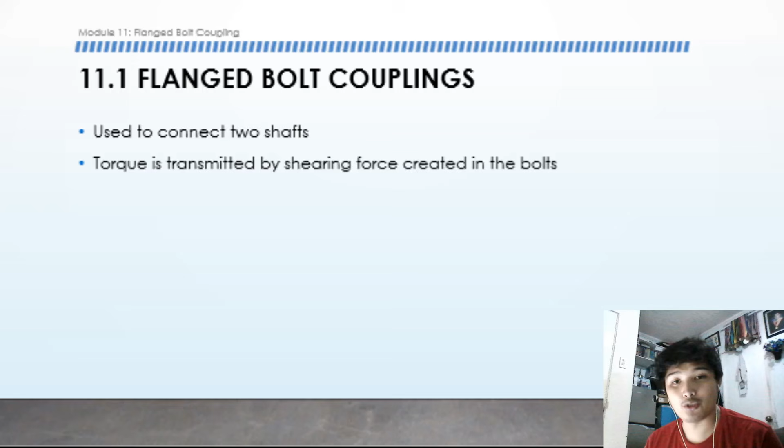So what is flange bolt coupling? Flange bolt coupling is used to connect two shafts, and torque is transmitted by shearing force created in the bolts. So what does it look like in actual application, class? Okay, so it looks like this.

So as stated, it is used to connect two shafts. This means, class, it's possibly because we can't manufacture a very long shaft. So what we do is make two shafts and then connect them. And that connection is what we call flange bolt coupling.

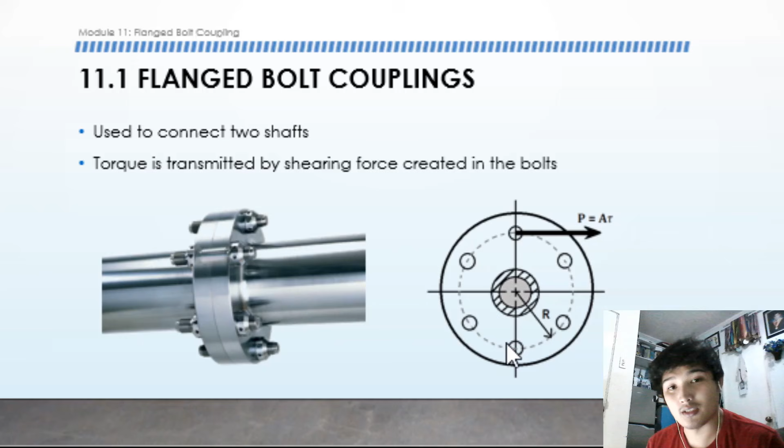So the tendency is, possibly if the force is large enough, it can exceed the allowable shearing stress of our bolt, so it's possible it can break. So we need to consider how much force P the bolt can carry, so we can also design how much torque this flange bolt coupling can resist. Okay, let's start the analysis, class.

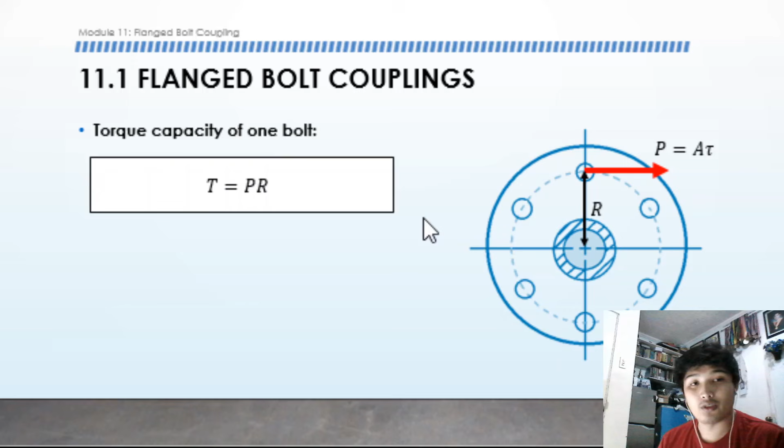Or shall I say, for n number of bolts in one bolt circle, to make our formula general. So we say, class, that all of them offer resistance to the torque, each with the same amount of P.

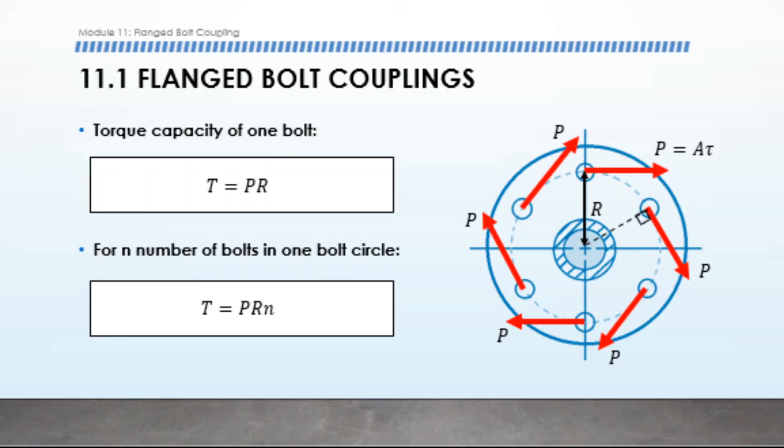So, dapat perpendicular po sila. Ayan, offer din siya ng P. And then, lahat ng bolts mag-offer ng P. So, therefore, the total capacity ngayon ng 1 bolt circle natin na torque is PR times the number of bolts. Okay po? Madali lang siyang tandaan po, ano?

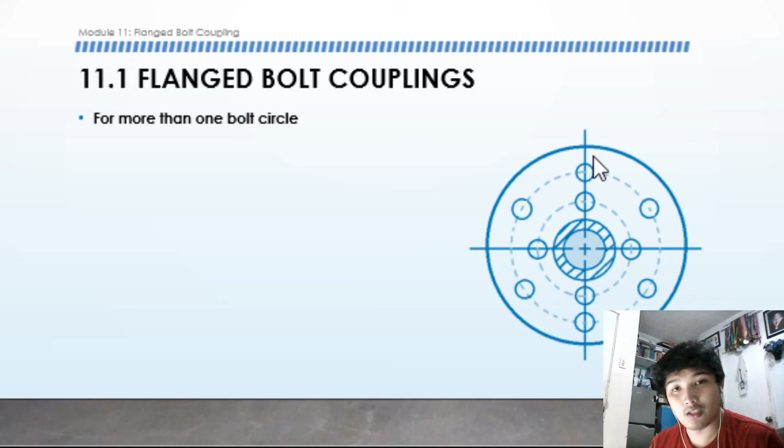So, next, what if hindi lang 1 bolt circle ang nag-exist? Possible kasi, class, na dahil sa sobrang laki ng torque T na kailangan ipa-carry natin, kailangan natin ng sobrang dami ng bolts para ma-resist siya. So, what if ganito po yung nangyari? Meron tayong outer bolt circle and then inner bolt circle. Okay? So, ano po naman po yung capacity na torque nito? Flange bolt coupling na po na ito.

So, kung i-analyze natin po siya, yung outer bolt circle is may radius R1. And then yung inner bolt circle is meron siyang radius R2. So, di ba sabi natin, class, is that mag-offer sila ng resistance. Therefore, yung outer bolt is mag-offer siya ng resistance na P1 since R1 yung ginamit natin sa kanya. And then, syempre, yung inner bolt, mag-offer din siya ng resistance dun sa torque natin, which is P2 naman po. Okay? Kung makikita mo yung diagram ko na to, class, mas mahaba yung ginamit kong line for P1 and then mas maiksi sa P2.

Kasi, class, kung marirecall nyo sa discussion natin sa torsion, di ba, yung maximum shearing stress is nandoon sa extreme fiber. So, pag mas malayo ka, mas malaki yung shearing stress mo. So, the same dun sa force na i-carry niya. Mas malayo ka sa center, mas malaki yung force na i-carry mo. Tapos, habang mas lumalapit ka, mas lumiliit.

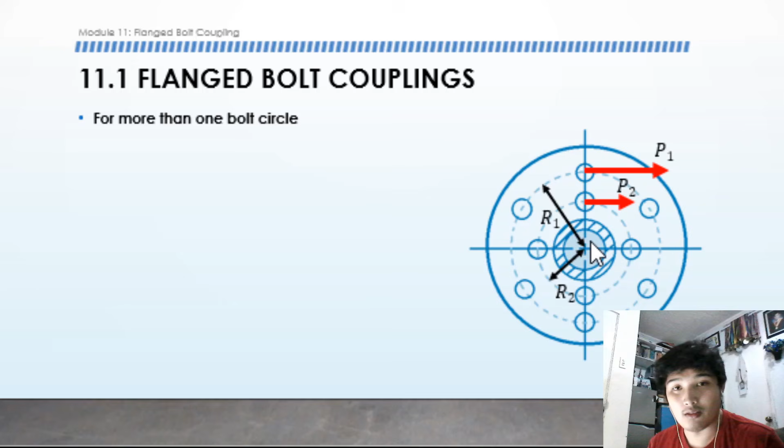Okay po? So, kung ang bolt capacity nito ng outer bolt natin is P1 times R1, tapos kung ilan sila, so that is P1 R1 N1. At yung bolt capacity naman ng inner bolt circle natin is P2 times the radius niya R2, tapos times kung ilan sila is N2. So therefore, the total capacity ng ating flange bolt coupling is P1 R1 N1 plus P2 R2 N2. Ganun po siya. Okay po?

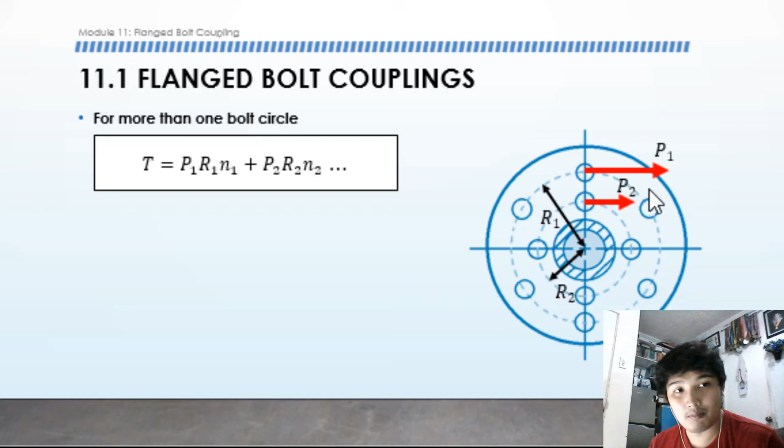Ngayon, class, kailangan bigyan natin ng relationship yung force carried by the outer bolt circle pati nung inner bolt circle natin. So, may relationship sila, class. Anong relationship niya, class? Okay, ayan, linear ang relationship. Pero para maging general ang relationship niya, class, ito po yung formula na susundin po natin: that P1 over A1 G1 R1 is equal to P2 over A2 G2 R2. Okay, yan po ang general formula ng relationship ng P1 to P2.

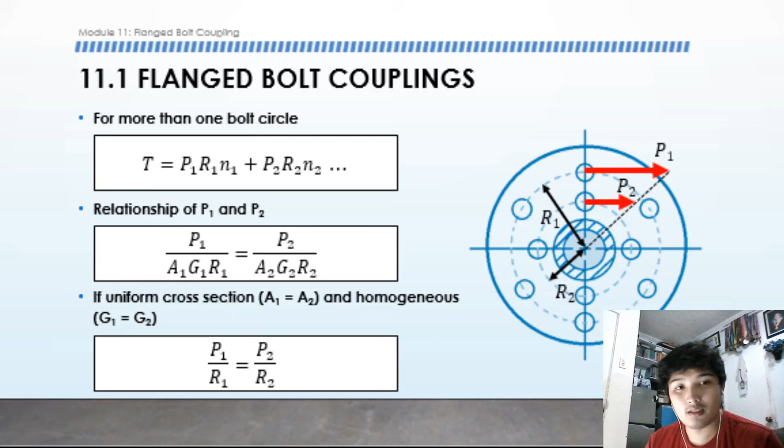Ngayon po, class, madalas kasi ang ginagamit dito is that yung bolt na ginamit sa labas is the same ng bolt na ginamit sa inner bolt circle. Or shall I say that yung area neto is the same dito. At dahil same sila ng material, so therefore, same din sila ng value ng shear modulus. Okay? So, kadalasan ganun po yung nangyayari. So, to simplify further the equation, if uniform yung cross-section and homogeneous yung mga bolts natin, so we can say that P1 over R1 is equal to P2 over R2. Yan po yung simplified equation relating P1 and P2. Okay po?

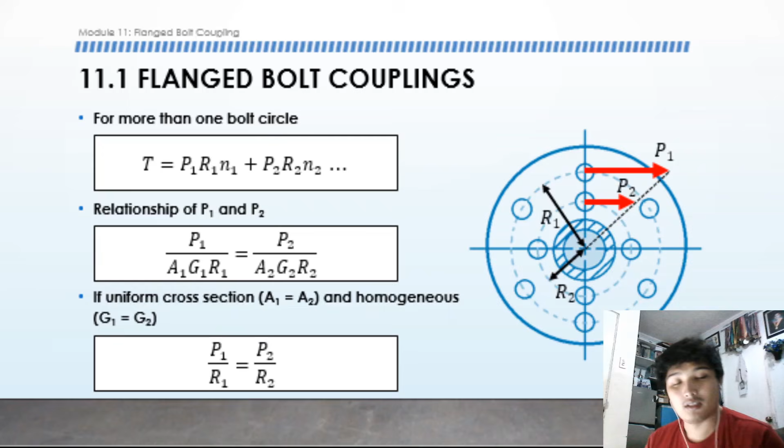So, patandaan na lang po ng mga formula and then gagamitin na lang natin siya mamaya. Yung formula na yung, class, madadali pa yung tandaan. Okay, so madali lang yung analysis natin dito sa flange bolt coupling. Okay? So, yun lang yung mga formula involved, no? Maiksi lang siya. So, mas maganda is i-apply na lang natin yung mga formula na na-discuss natin sa mga sample problems natin dito sa topic natin.

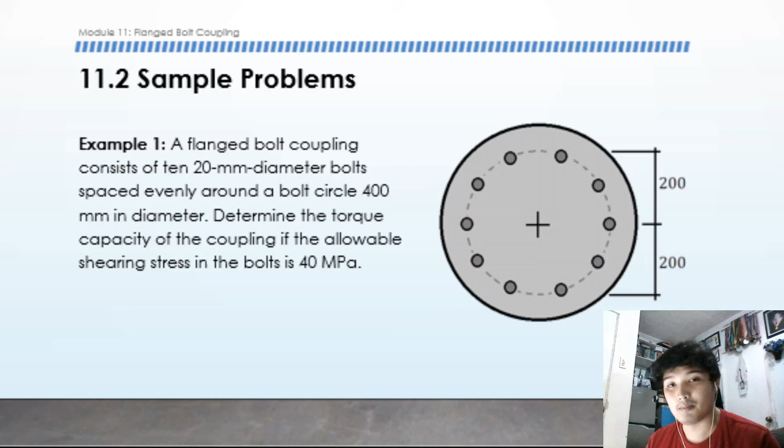Okay po? So, let's say for example, number 1, a flanged bolt coupling consists of 10, 20 mm diameter bolts spaced evenly around a bolt circle 400 mm in diameter. Determine the torque capacity of the coupling if the allowable shearing stress in the bolt is 40 MPa. Okay? So, first thing to do is i-draw muna natin siyang ulit.

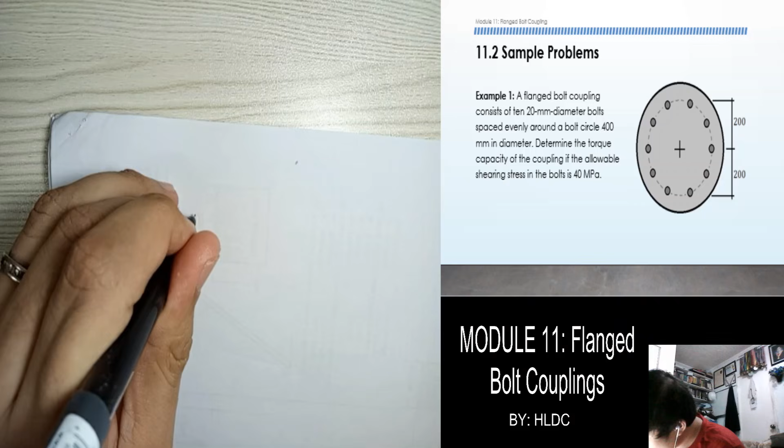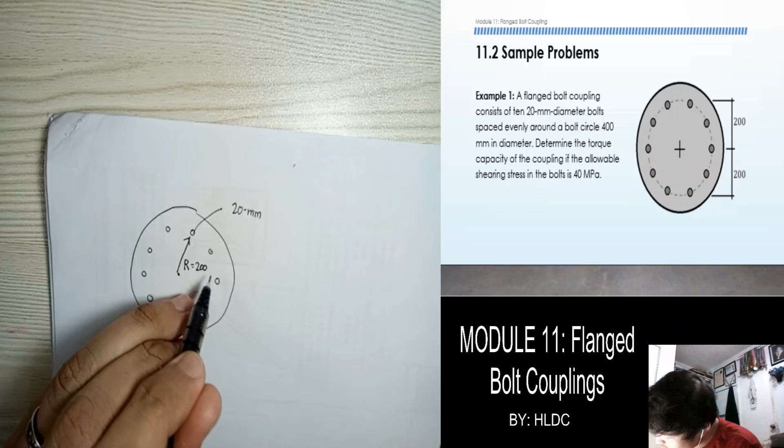So, ito daw siya, consist po siya ng 10 na 20 mm diameter. Ayan no, 20 mm. And then, ano pang binigay sa ating class? Binigyan tayo ng diameter na 400 mm. So, therefore, from the center, na yung radius nito is 200 mm. And then, binigyan din tayo class ng allowable shearing stress nung isang bolt natin, that yung shear stress allowable is 40 MPa. Okay, so tinatanong sa ating class ilan daw yung torque capacity netong flange bolt coupling natin. Okay?

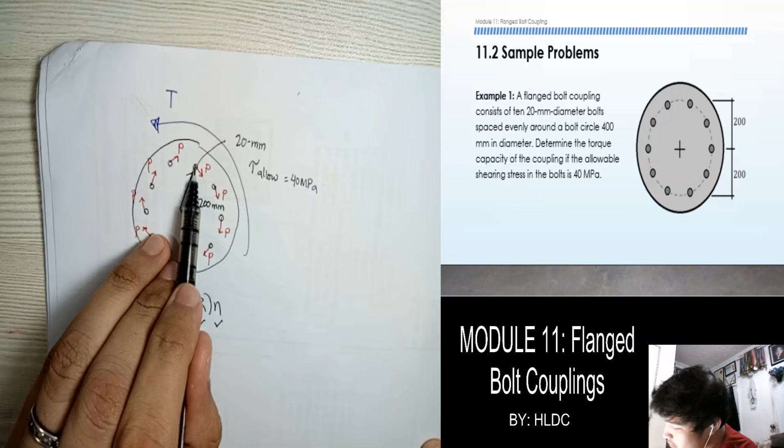So we have the radius, we have the number of bolts, we don't have the force P yet. How much can one bolt carry in terms of P? We can get this using the allowable shear stress. Recall that shear stress equals the shearing force over the sheared area. In this case, the shearing force on the bolt is the force P, and the area is the area of the bolt itself.

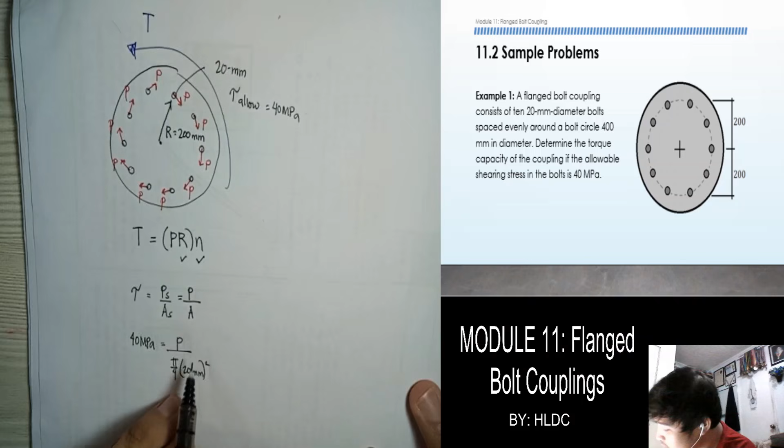So let's put 40 MPa equals P over the area of the bolt, which is pi over 4 times the diameter squared, 20 mm squared. So MPa, mm - definitely the unit of P is in Newton. So how much is P?

Okay, so the answer is 12,566.37 Newton. So that's just force P.

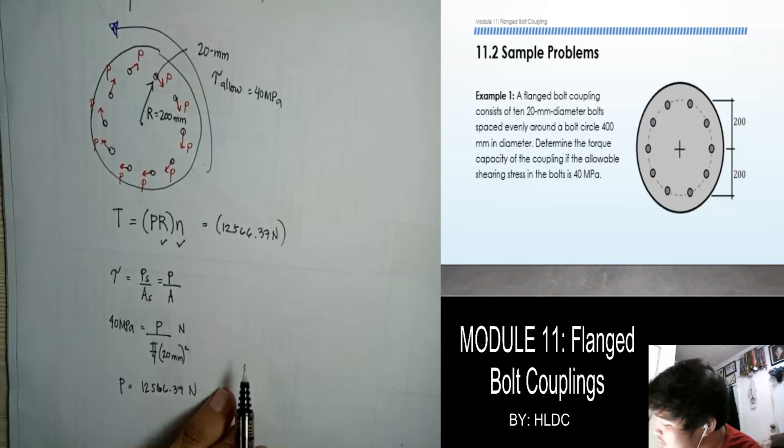So let's input that into the torque formula. So it becomes 12,566.37 newtons times the radius which is 200 mm, times however many pieces there are, which is 10. So the unit of this becomes Newton millimeters.

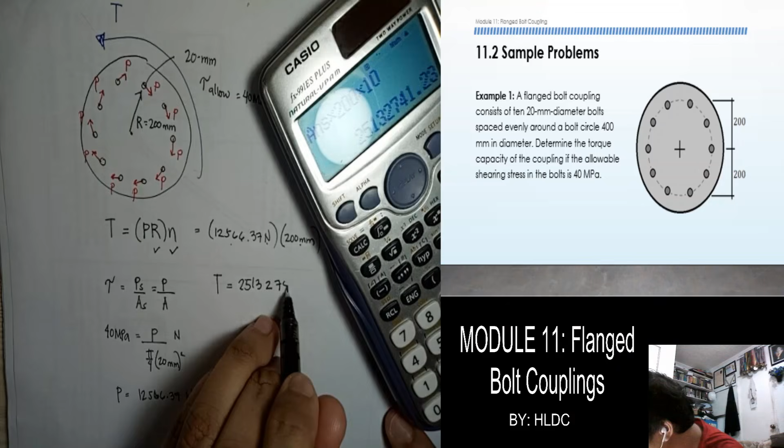So now, how much is the torque capacity of our flange bolt coupling? Times 200 times 10. So the answer is 25,132,741.23

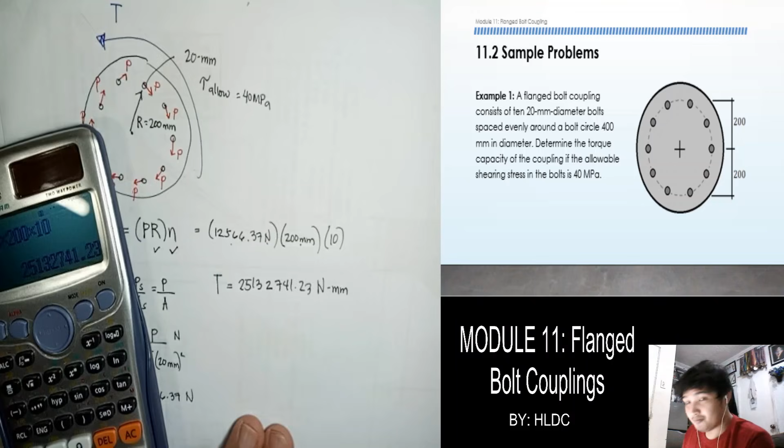Newton millimeters. Okay, so what we do here class, since the values we see are so large, let's convert it to kilonewton meter. That's common, right? To convert it, we multiply by 1 kilonewton per 1,000 newton, and then times 1 meter over 1,000 millimeters. So the newtons cancel, and the mm cancel, leaving kilonewton meter. Or simply, divide by 1 million.

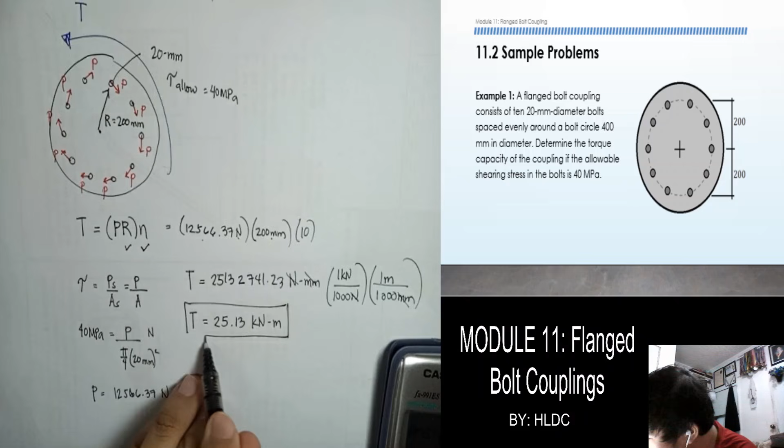So the answer is 25.13 kilonewton meter. Okay, so this is now the torque capacity without exceeding the allowable shear stress of our bolts. So let's check class if the answer is correct. Okay, so correct.

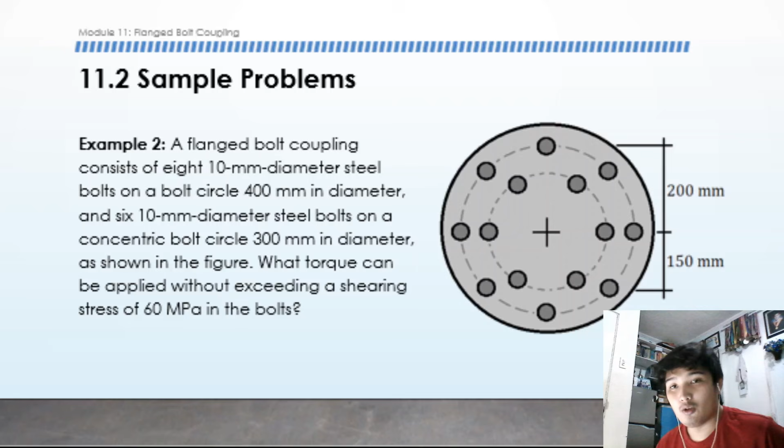So next: a flange bolt coupling consists of 8, 10 mm diameter steel bolts on a bolt circle 400 mm in diameter, and 6, 10 mm diameter steel bolts on a concentric bolt circle 300 mm in diameter as shown in the figure. What torque can be applied without exceeding a shearing stress of 60 MPa in the bolts?

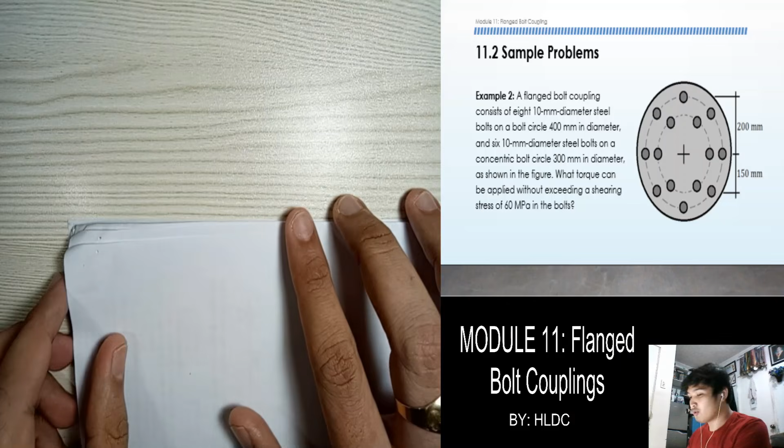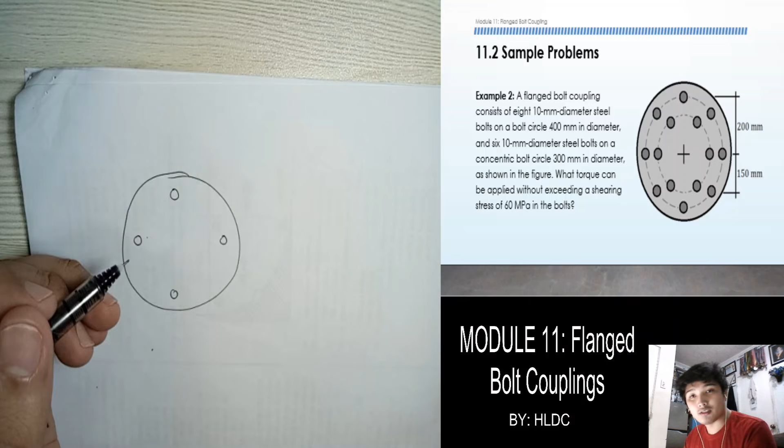Okay, so this class is another type of problem where there are 2 bolt circles that exist. Anyway, it's easy. So let's say this is our flange bolt coupling. On the outside, there are 8. And then class, the outer and inner have the same diameter, and both are steel, right? So the equation we'll use is simplified - we'll relate the force on the outer to the force on the inner.

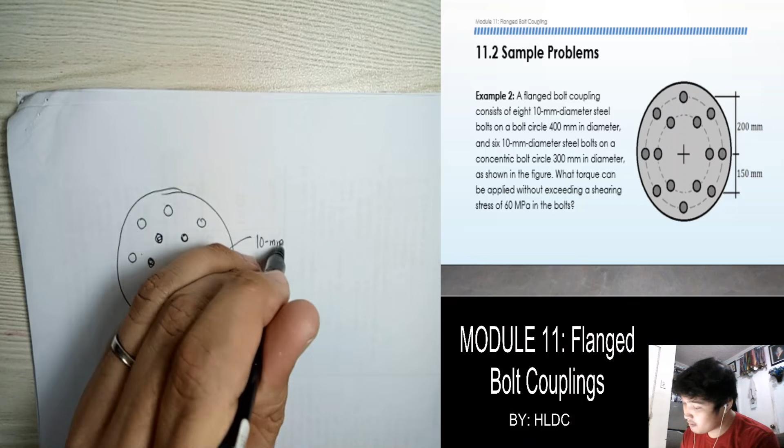Okay, so wait. So we're given class, this is 10 mm, and the inner one is also 10 mm. And then, measured from the center, the outer radius, which we'll call R1 - so for the 400 mm diameter, right, I'll make R1 200 mm radius. And then for the inner one, let's say this is R2, so we're given diameter 300, so I'll make it 150 mm radius.